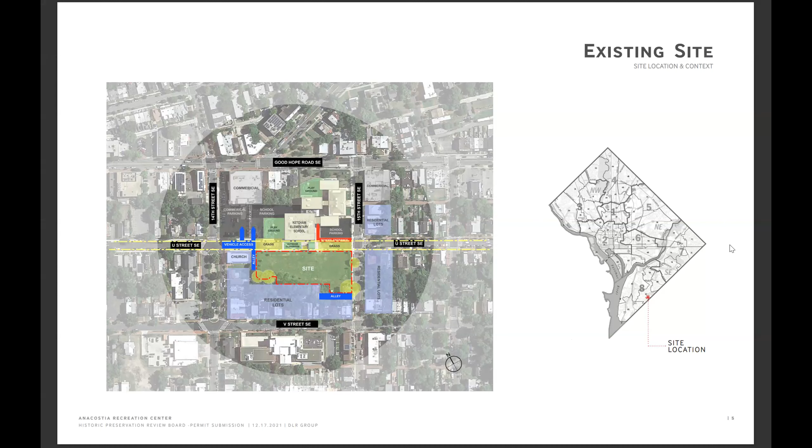One thing I wanted to highlight here is that when the Ketcham Elementary School was expanded in the 60s, they cut U Street from in the east-west orientation. You can see where U Street kind of stops and then continues on the other side. And I point this out because it's a feature that we revisited in the site planning stage.

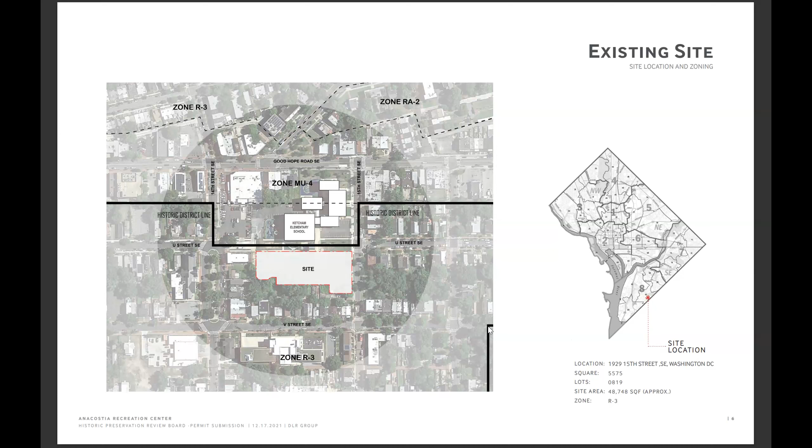Typically when we're looking at rec facilities or park facilities, the ideal layout would be something a little bit more open. So in this case we have a somewhat linear site with some unique geometry to work around with the program. But yes, this is a historically designated zone, which factored into the development of the design.

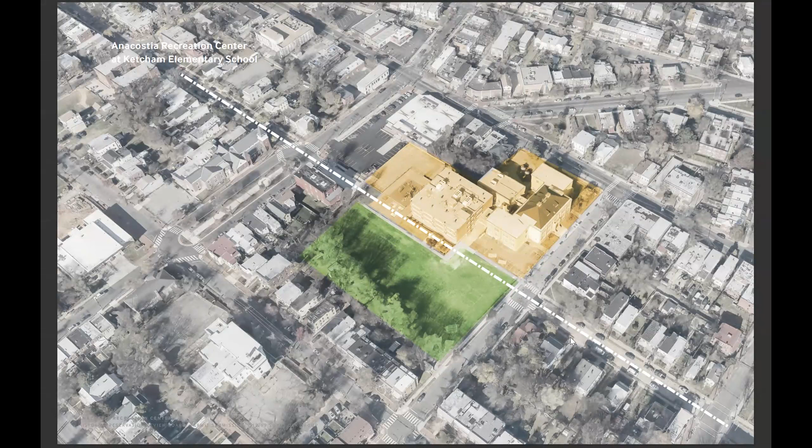Once this thing loads, you'll see the topo. There's always a challenge on every project, and in addition to the unique geometry, there was also some topography to work around. There's about a 10-foot elevation change from the northwest corner down to the southeast. So where you site the building, making sure it's accessible from the approaches and the public way, was something we had to work through with our civil engineer and with the grading.

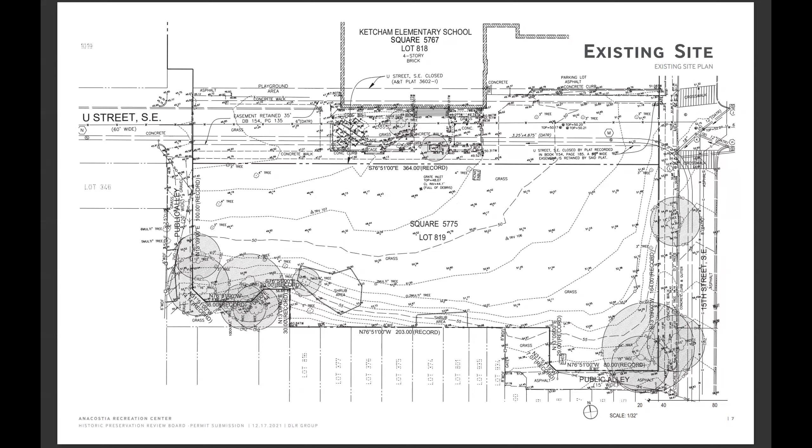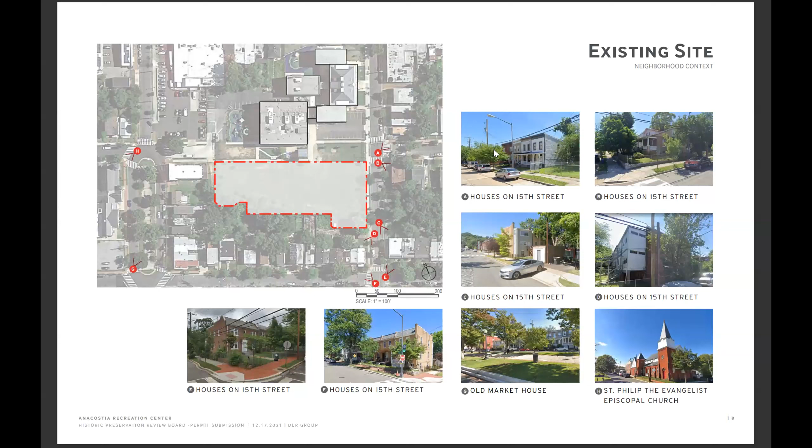It also serves as a frontage for Ketcham Elementary. Here you can see other uses like St. Philip Church, which is to the west. You can see the low scale apartment building types, but also some of the historic row houses that occur on 15th Street and are contributing structures to the Anacostia historic fabric. Here's a streetscape of 15th Street, just to get a better handle of where the building is lying in terms of architectural context.

Ketcham is on the north of the site. Here you can see the open green area—right now it's just fenced in. As you're walking down 15th, you just see the big open space, and then you transition over to some of the low-rise apartment buildings.

Of note is the various approaches to exterior materials. We have brick, we have wood siding for some of the older buildings, but also a range of colors, from light blue to traditional brick to yellow, and then Ketcham, which has that kind of yellowish color to it.

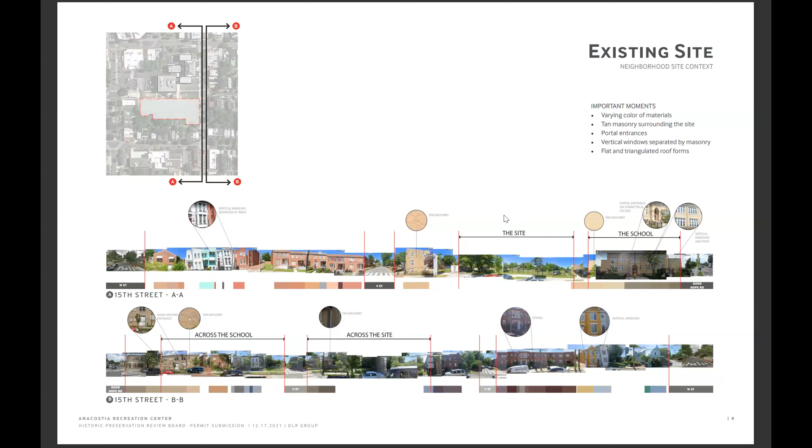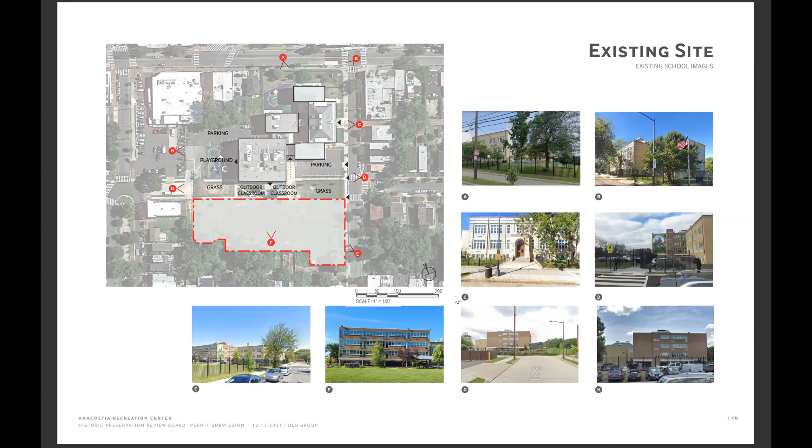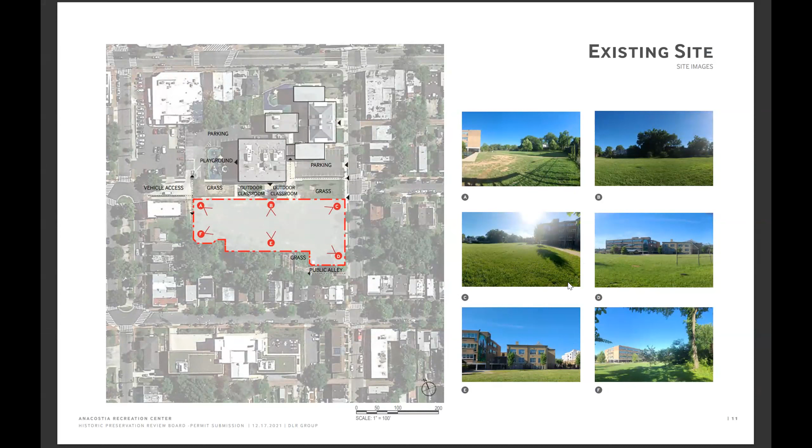Because this is a historic district, we had to take note and be mindful of the historical typologies around the neighborhood. I think primarily the row houses were the main contributing structures we encountered within the historic boundary. Not much civic precedence, but we did have Ketcham, although it's technically not in the historic zone. We also have DC Prep, which is a block or so south of the Anacostia Rec Center site.

These two served as references and guideposts for the development of the building design. There's also some historic commercial frontage a few blocks away. So in terms of finding a fit within the fabric, these were the considerations we had to make—citing pre-existing civic precedents, but also taking cues from the residential, lower scale buildings.

Since this is a community facility, I think a major component of developing the design was ensuring strong engagement and input from the community and other stakeholders. Early on there was an extensive programming and visioning series of activities, starting with meeting with DGS and DPR to ensure we're in alignment with their overarching goals and objectives.

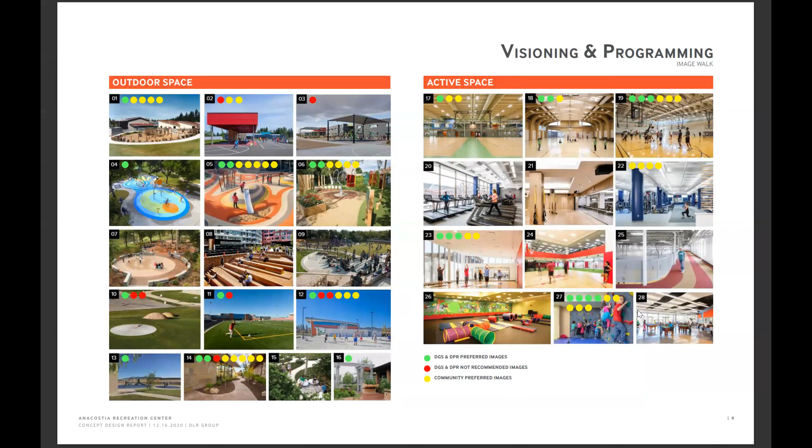We went through our imagery walks with the community. Of course, back then it was all virtual, so we didn't have the benefit of meeting folks in person, but we made do as best we could, showing them images to get a sense of what the community liked and did not like, to inform development of the design.

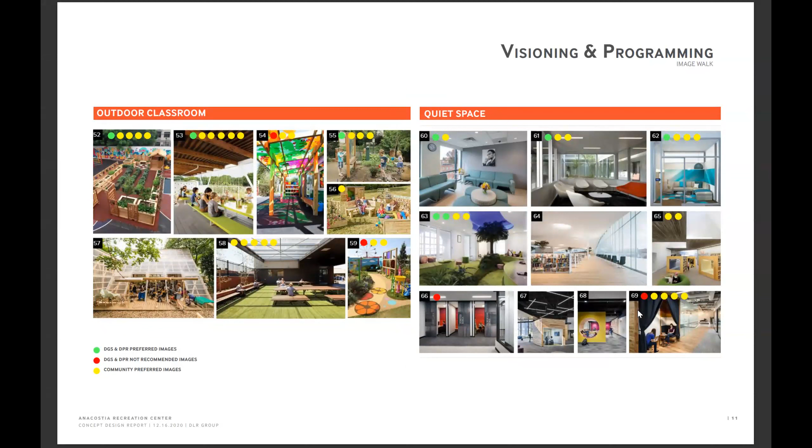Looking at specific types of spaces: gathering spaces, educational, outdoor classroom and outdoor meeting areas, and then spaces for quiet and respite.

At DLR, we've established and developed a values workshop which addresses sustainability to ensure the community's thoughts on how they want the facility to function within their community are addressed, whether it's energy use, well-being, or drawing from nature. So we share these

topic cards, and then at the end of the meeting come away with some goals and objectives. Out of this exercise, community activation, play, beauty and inspiration, community resiliency, equity, and air quality came at the forefront of the priorities that, as part of the design, we should emphasize and explore.

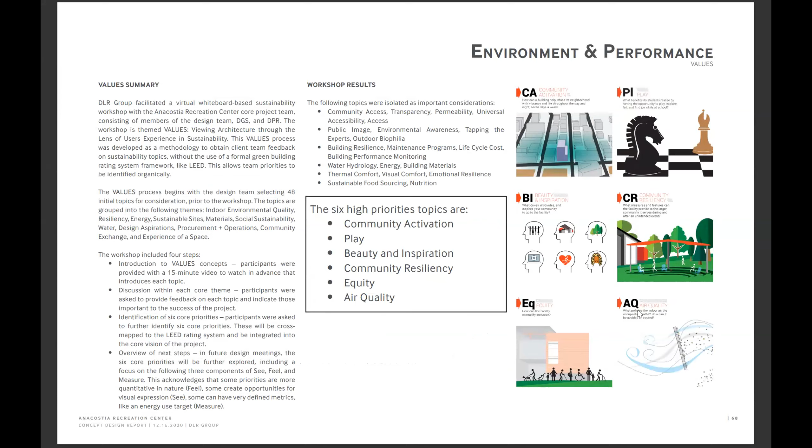We engaged the community with some online surveys, so got quite a bit of good feedback. Coming to the top was the need for, or the desire for, fitness and gymnasium space. So the gymnasium and the fitness room were also part of the original program that DPR put together. Fortunately, that aligned with community needs.

A play field and a track—since we are developing on an open site, the community wanted to make sure that there was still access to that.

And then safety and security arose as another number one concern. Some of the input we got from the community: they want this to be a beacon of hope for a neighborhood that has long struggled with security and safety, ways of engaging their youth, but also crossing the multi-generational community, making sure everyone is engaged and has an opportunity to benefit from the facility.

So with that, here's our program. Rachel mentioned the scale—it's not a large facility, only 12,000 square feet, of which a good chunk is the gymnasium. So how we make this flexible for various uses was something we needed to work through.

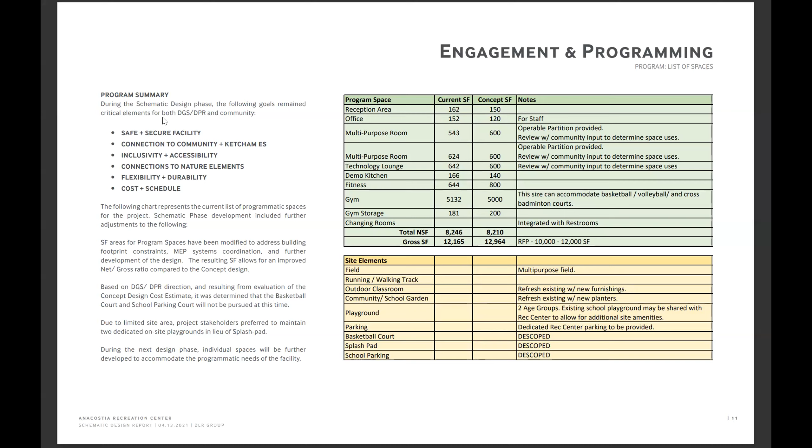One thing to add about our community engagement process—like Edgar was saying, it was in the middle and towards the end of the pandemic, so most of that was done virtually. But we found that you can get pretty large participation in a virtual community meeting or engagement, because you have some people that don't typically raise their hand and speak in a public environment, but they're much more comfortable adding or contributing to the discussion virtually.

They can raise their hand, put in the chat, provide those dots virtually. So being virtual, we actually received a lot more feedback from the community.

Just as a comparison, our last community meeting was held at the Anacostia Library, in person, and only a handful of folks showed up. It was a very productive and lively meeting and discussion, but it just gives you a sense of how accommodating a virtual meeting can be for a lot of folks in the community.

All right, moving on to site planning. As I alluded to earlier, one of the things we wanted to explore was this reconnection of U Street, because they have this long site with opportunities to access it from 15th Street, but also the U Street intersection towards the west. It's about how we reconnect and make use of circulation across the site.

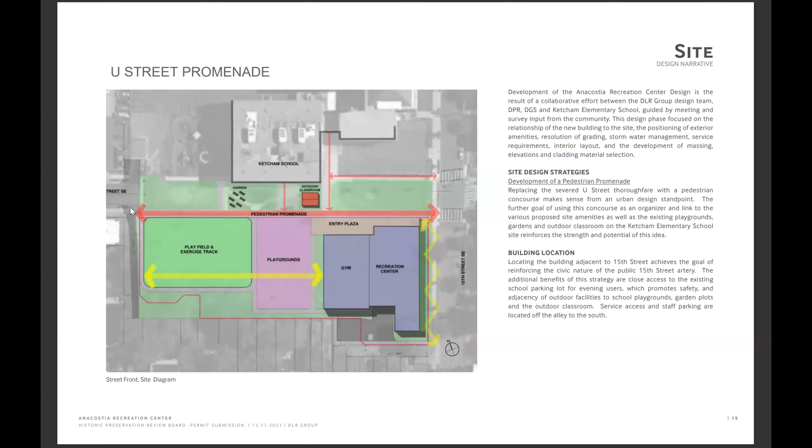So it achieves a few things. One, it establishes that community presence along a street where pedestrians and vehicles maneuver throughout the day, also kind of adjacent to the Ketcham School. So with that, we established an entry plaza on that connection. That's the primary entrance. And then there is access from the west side through a gate, so you'd be able to access it from either side.

In terms of the programming, this is the arrangement we landed on. For the building itself, since we're fronting 15th Street, all the activated spaces are along that end of the building. Public access coming from the corridor, from the promenade. There's a secondary school access to accommodate and help provide dedicated access to school, since they'll be accessing mostly the gym in most cases.

And then service access—we had an alley to the south that was able to accommodate the parking spaces for the facility, trash access and handling, but also the utilities. So all the Pepco and gas lines are coming in from the south side. And then on the outside, you have the school and sort of the interconnection between the playground and the fields.

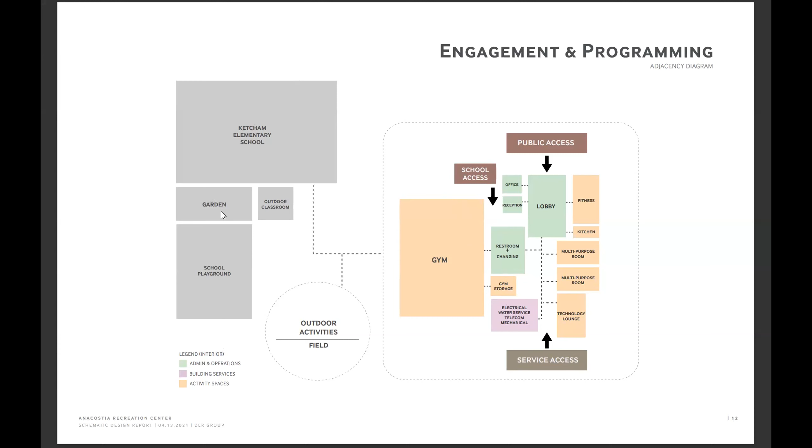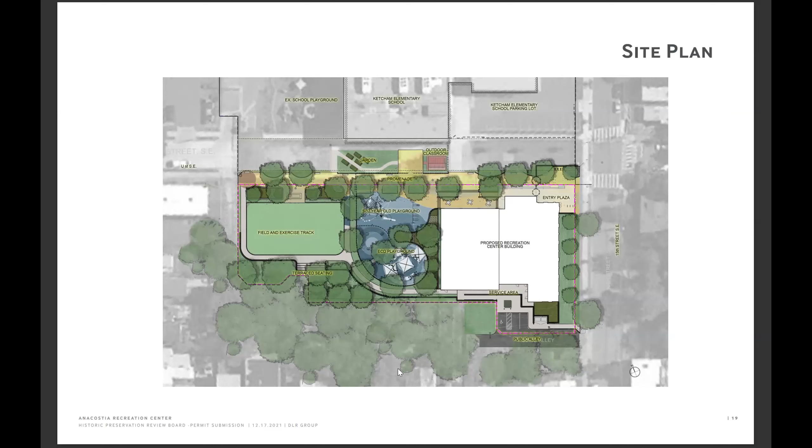All right, highlighting the entry plaza. It was important that we had a prominent place of entry to introduce the building and access to the promenade. In our discussions with DGS and in trying to work out a program for the Art in Public Places, we've created this entryway that features decorative metal panels that an artist will create imagery for, to accentuate and highlight the entryway as a deviation from just regular metal picket fencing—something that's a bit more decorative, more welcoming and visually interesting to draw folks into the entry plaza.

And then we propose these pivoting gates that would open and really open up the promenade, as opposed to single man gates that would seem a little bit more prohibitive. So again, you see this balance between really trying to address the security of the site, but at the same time maintain it as a welcoming destination.

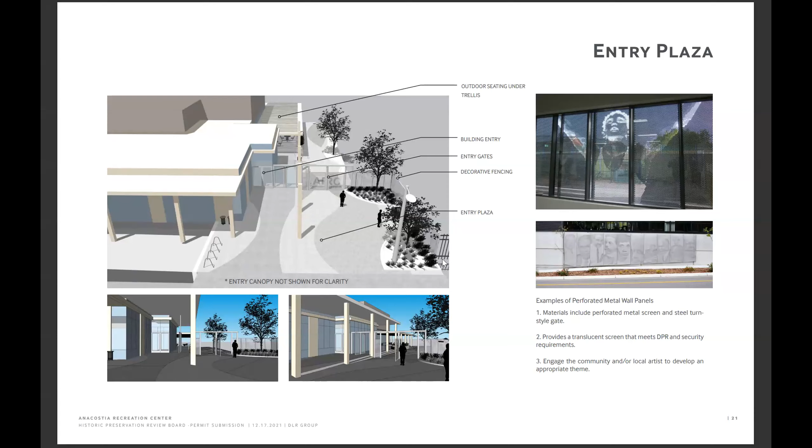And speaking about security, it was important that we highlighted to the community members, since they were concerned about security, how we were securing the site. So fencing all around the site, continuing the fencing that's there. Your access points are limited, so you have the entry plaza on 15th Street, the west entry off of the U Street intersection, and the service access, which would be limited to staff.

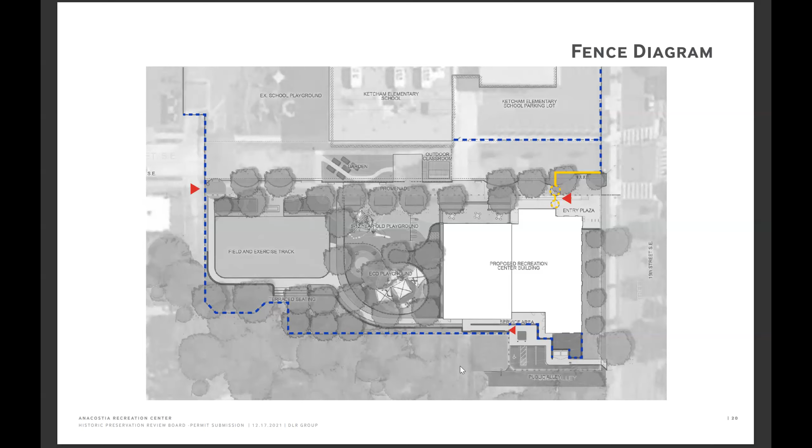Moving on to the building design. As Rachel mentioned, this project had the full slate of agency reviews subject to it, starting with the Commission of Fine Arts, being a DGS funded project, the Historic Preservation Review Board, because we were in the Anacostia Historic District, and then the Office of Planning established this pilot program for the design excellence reviews. They had a committee of local architects brought in to critique and review the design and offer input. That was a fruitful interaction with them.

And then some of the neighborhood groups, like the Historic Anacostia Preservation Society, made up of community members, the ANC, going through the neighborhood commissions, and just the broader community engagement activities. In addition to meetings with the school, the principal was pretty engaged early on and offered some great insight.

Here's a floor plan. On the east side, fronting 15th Street, you have the main entry, with an entry plaza providing access to the vestibule and the building reception area.

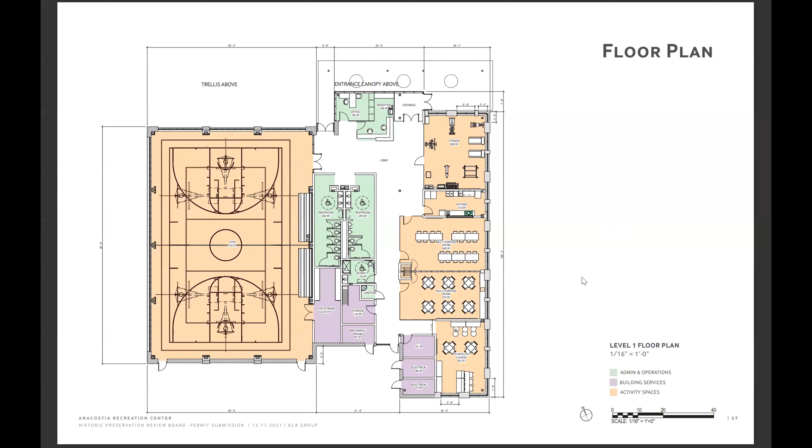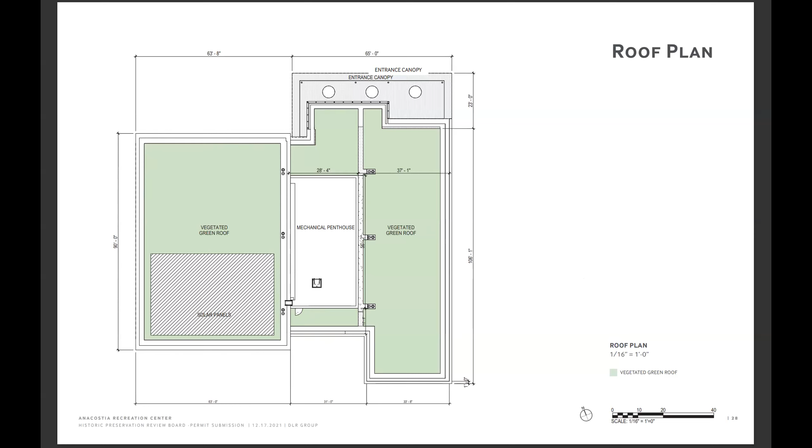All the service spaces are off the south side, which is where the utilities come in. As part of trying to meet our stormwater management requirements, we're relying on a vegetated roof to meet some of that. You can see the vegetated roof on the lower portion, and on the upper portion, we're meeting green code requirements by including solar panels, so it's partly renewable.

If you remember some of the earlier images, specifically Ketcham and DC Prep, in our meetings with CFA and the Historic Preservation Review Board, the use of brick and the articulation of the 15th Street facade were all based on those pre-existing precedents, as well as the color, which we drew from the pre-existing streetscape.

With the 15th Street frontage, you have the offsetting and the scaling up as you work towards the gym. We did explore putting the gym on the 15th Street side, but the scale was a bit much for that pedestrian zone.

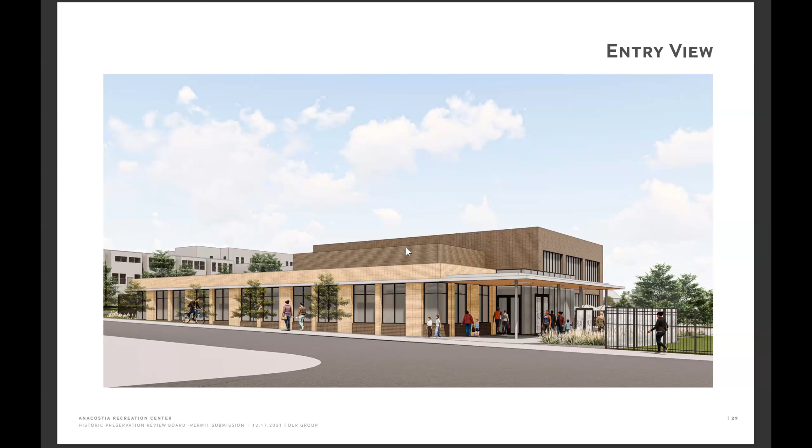So there's a step up that occurs with the way the building is laid out massing-wise. Here's a view towards the gym from the pedestrian side. Obviously the gym is inherently going to be a big blocky mass, so we explored ways to minimize that bulkiness.

You can see we've introduced some glazing on the upper portion. We felt it was important to maintain a visual connection between the gym and the outdoor spaces, so fortunately we were able to maintain the glazing you see here. We did have more, but that was value-engineered out.

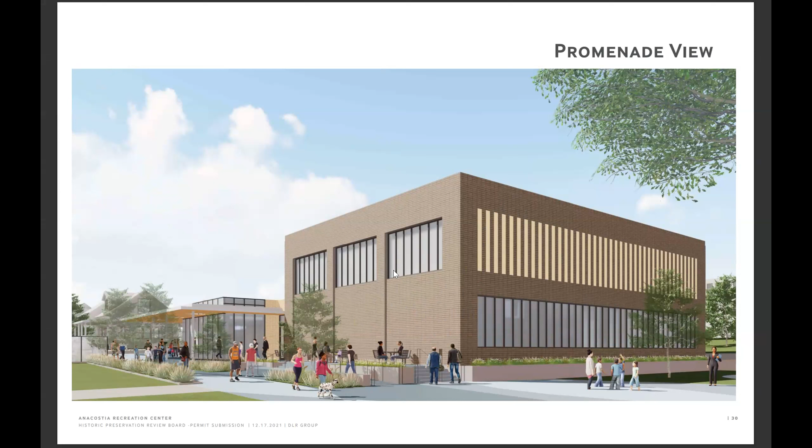And then just looking at ways to further articulate the brick with this accent banding and also some of this detailing, accenting, and creating different planes on the elevations to add more visual interest.

Here's a view looking north. You can see Ketcham beyond.

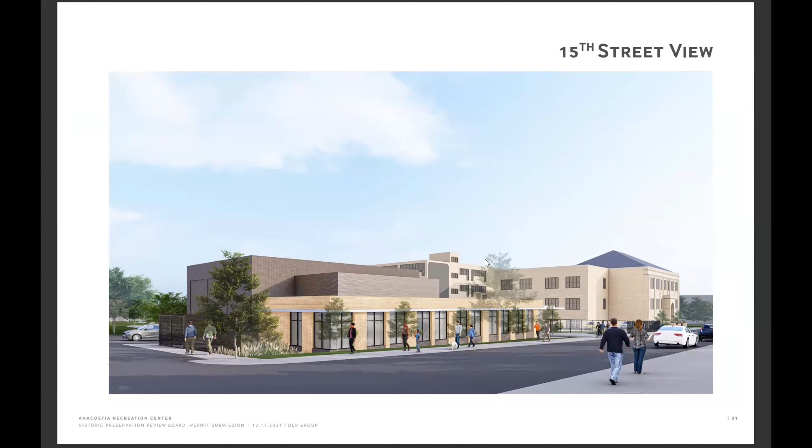And this is some of the imagery we shared with CFA, describing the intent of the material: the yellow brick, the gray brick, and corrugated metal for the mechanical enclosure.

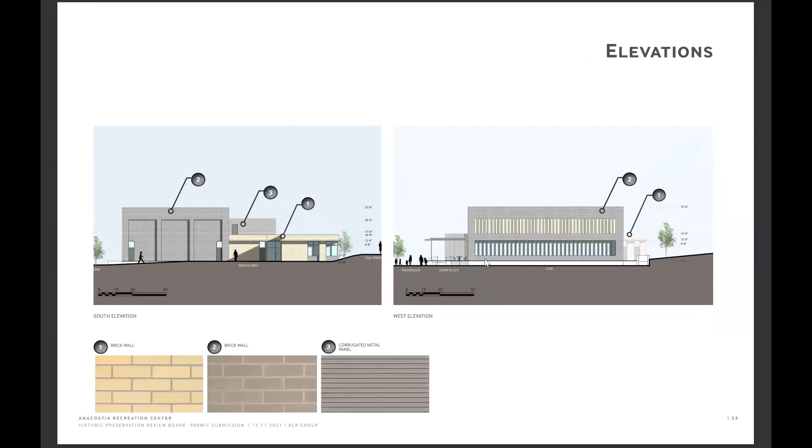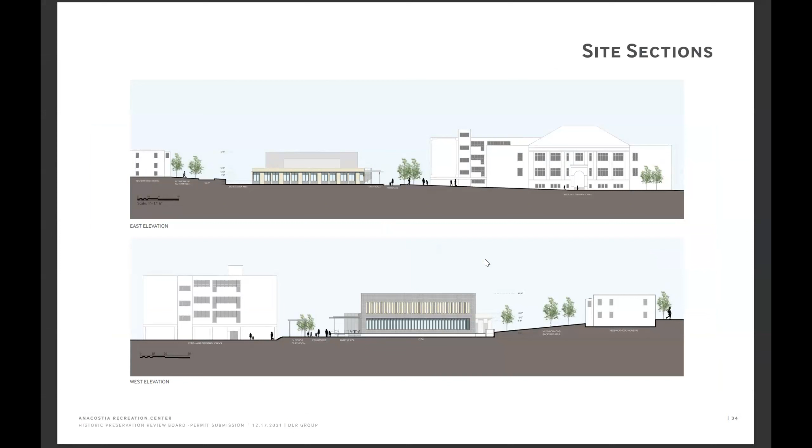And then how the massing relates to the surrounding context, with the Ketcham on the north side, but the more lower-scale residential on the south side, which interestingly, because of the topography, ends up being kind of in alignment scale-wise.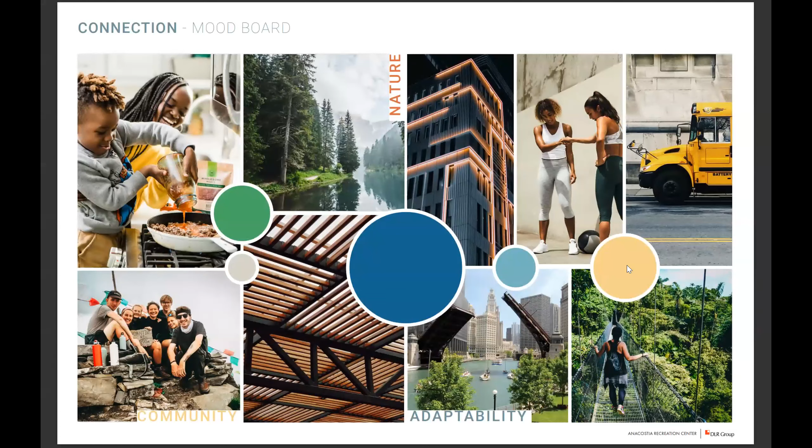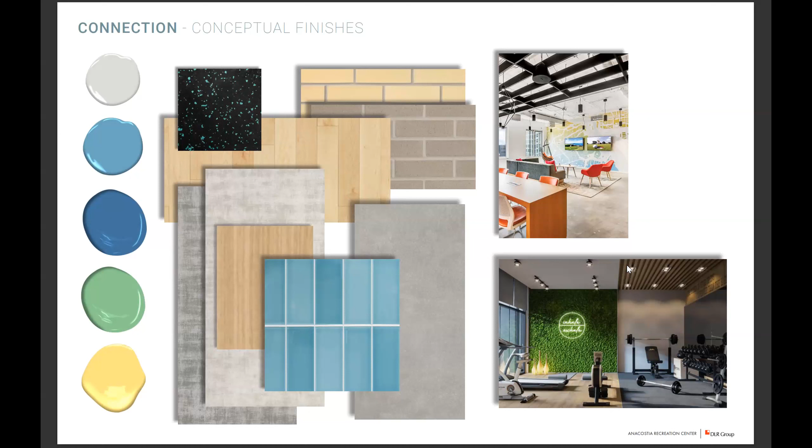So in our color palette and material palette, as much as possible we wanted to integrate the use of wood, as well as using colors like blue, which alludes to water and can allude to sky, really just to have that calming effect within the spaces.

Wow, that went by quick. So that's it for the presentation. I guess now we can open it up to some Q&A.

Rachel, I don't know if you see anything in the chat, or we can just take questions. No, I think we can take questions, and maybe you want to—we don't need to share. Okay.

Okay, so I guess I'll go ahead and share my screen, which is really a view of the school, I mean, of the recreation center. Does anyone have any questions that they would like to ask the design team at this moment?

I had a question about the siting, and wondering if there was a concept that had attached the rec center to the elementary school. Maybe you can explain how the students get from the school to the gym on a rainy day.

Right, sure. Maybe Edgar can talk about how they access the school, but it was very interesting because we looked at site planning at the beginning of the project, and there were really two ideas. One consistent idea of the pedestrian promenade that connects both the east and west, continuing or bringing back that pedestrian access that was closed off when the addition of Ketcham occurred in the 70s. We thought that was very strong and needed to happen.